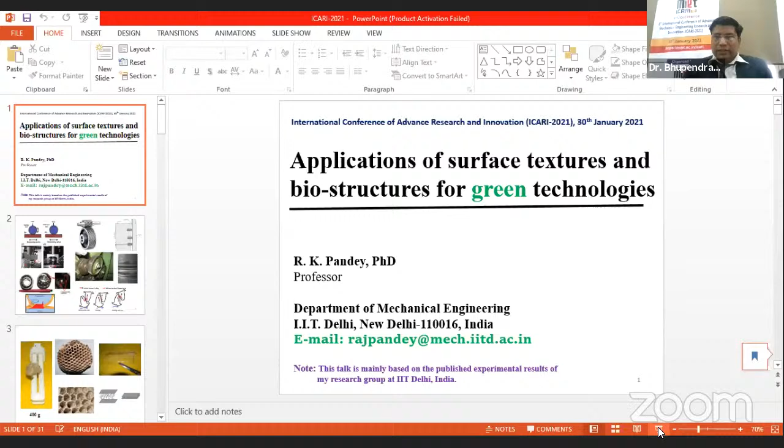Thank you so much. Am I audible? Yes, sir, you're audible. So I'll be talking through a presentation, I'm sharing my screen. Screen is visible? May I request to know? Hello? Yes, sir, you're audible. Yes, I'm audible and the screen is visible. Sir, your - not yet, sir. Not yet. Now? Now visible, sir. Visible now. Okay, so probably I have been given 10 to 15 minutes, so within that I would like to conclude it.

Whatever I am going to share, basically this is a gist of a small work we have done at IIT Delhi for developing the technology. So very clear cut, I'll be talking in terms of technology and how things have been achieved. Basically, we have used surface textures and biostructures.

Is it okay now? Can I speak? Hello, am I audible? Yes, sir. Okay, so if you see machines, we know very well that assembly of various components makes the machines. And if you see the assembly of components, basically contacts are being formed. These contacts may be concentrated contacts, meaning very small contact, or large contact area, which we call conformal contact, and small contact area non-conformal.

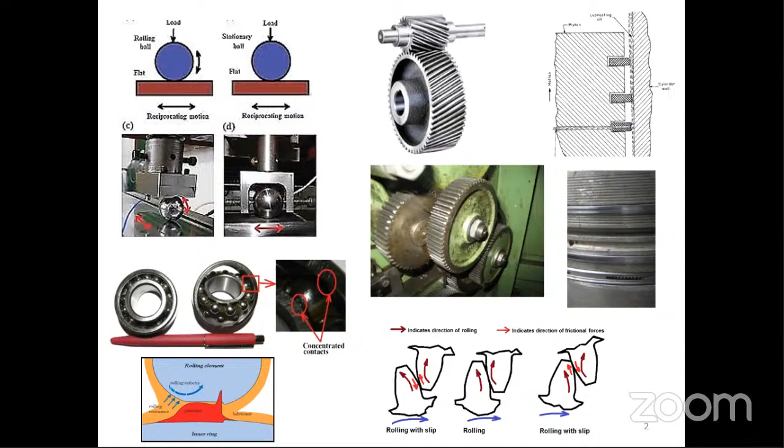So today things are failing at the surfaces, if you see. Those days are gone when things were failing in two parts, because technology is so mature, tools are available, so people can design that and that failure can be avoided. But when we come to surfaces, let's say bearing, ball and races, gears, teeth, wherever it is happening, friction is more.

So there, if you see at the interfaces, technology is not mature. If a particular operating condition, a contact is operating, this is perfectly fine, its behavior will be something else, friction will be something else, wear will be something else, noise vibration will be something else. Same contact, if we operate at different operating condition, then obviously things will change.

So the issue is that at the contact, things are not clear. And the way continuum mechanics based concepts have formulas available, theories, models, such things are not there at the interfaces, at the contacts. So issue is, people are still working to understand the temperament of the surfaces of the components and accordingly doing the manipulation for having a technical favor.

So if you see here, surface textures, it is emerging, and when we're talking about the technological issues, implying surface textures in 1-2 slides. So one point, if you are looking here in this slide, hope it is visible to you.

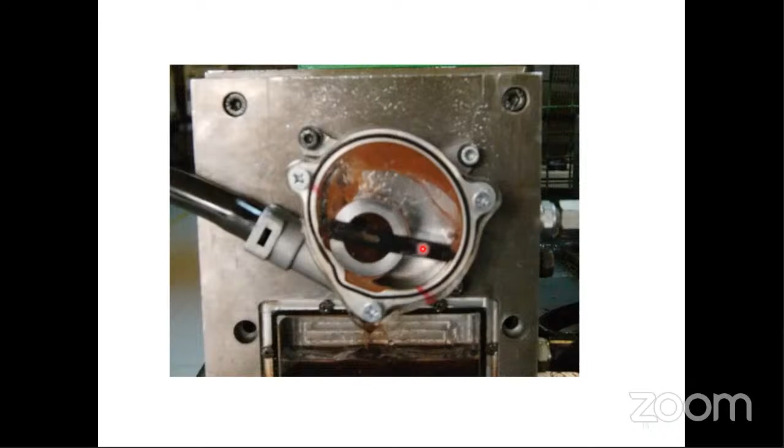And if you see very carefully, this slide vane is sliding. Let me go back and look here very quickly, just turning the slides. Here, if you see very carefully where it is, there is little bending here, so it is getting bent. Here if you see, this is a rotor and friction is present here between this and this surface, as well as here and here.

So the issue is that nowadays people are struggling to improve efficiency, and they are looking to kill the friction at some places at least. So when friction is here, it is not a good idea.

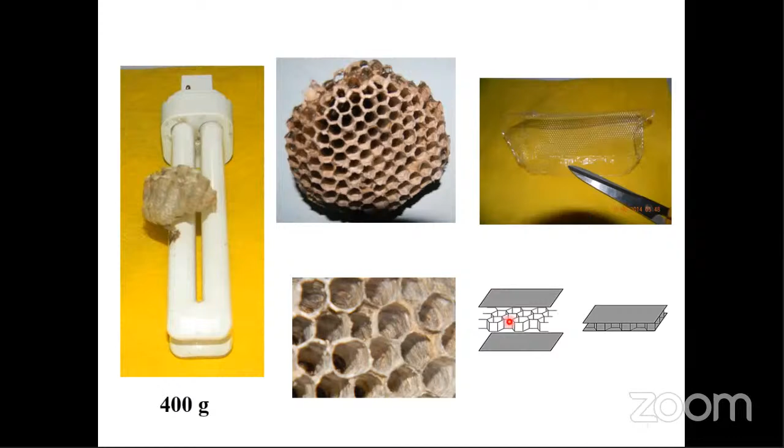So we brought the texture concept here. At the tip we kept it here, and here whatever bending you are looking at, it is there. So what we did, if you see here, this type of concept we used. A polymer layer is there, another layer is here. So using sheets only, we created this type of structure, whatever you are looking here. So now it was quite lightweight, and this type of bending was avoided. So lightweight, and tip friction we reduced using texture.

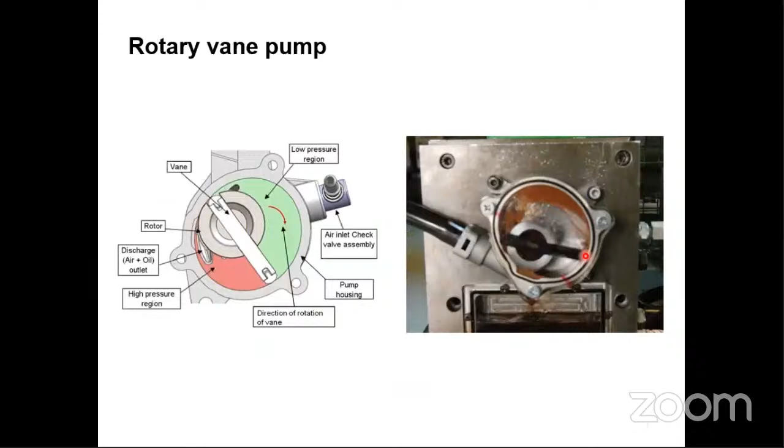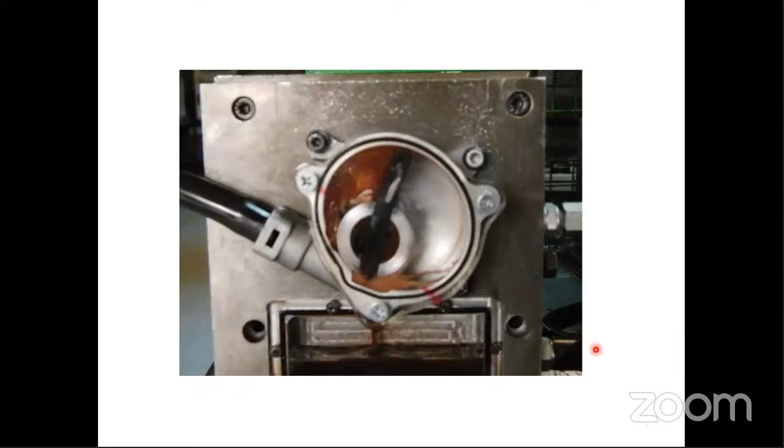I'll be talking about how texture plays a role in reducing friction. This is the technology we evolved basically. Now let us come to another point.

If you see concentrated contact, I mean when we are dealing with gears, ball bearing, cam follower etc., we know contact will be point contact theoretically, but practically when load is applied, elastic deformation will be there. So whatever line contact is there, that will be converted into maybe rectangular contact. Or if it is a ball on the surface, then point contact may become circular contact. We know very well that when we talk about concentrated contact, right now you are looking at the segment. This segment is basically one ball.

So how will stresses be varying? Stress won't be maximum at this point. The maximum shear stress will be maximum beneath the surface.

So the issue is, if we talk about this contact, if motion is happening at the contact, what will happen? Friction will be there in the tangential direction. If motion is here, then opposite to the motion, friction will be there on the surface. So when friction is more, wherever the dangerous point is, it will shift to the surface. You are looking here, right now it is here, it is coming to the surface. So it is not coming at this position, it is coming at this position. Earlier it was here, now it is shifting up.

So the issue is friction is very dangerous. Meaning, wherever a wound is there, suppose this is a very critical point. This critical point is coming to the surface and will be exposed, which is very dangerous. If any wound is there and that wound is open, then obviously it is going to be detrimental. So you are looking here, the same concept is being explained, and when friction is present, these are the isochromatics, basically maximum shear stress at the contact, how it will be distributed. We are looking, it is shifting to the surface. Now it is getting disturbed.

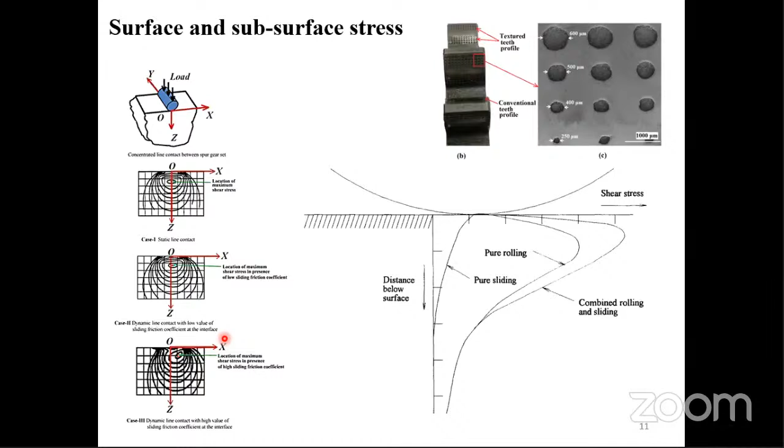So the issue is that when we reduce the friction, the tangential component will be less, and combined loading at the contact will mainly comprise compressive load, not tangential load. So the concern is, we know very well all these concepts.

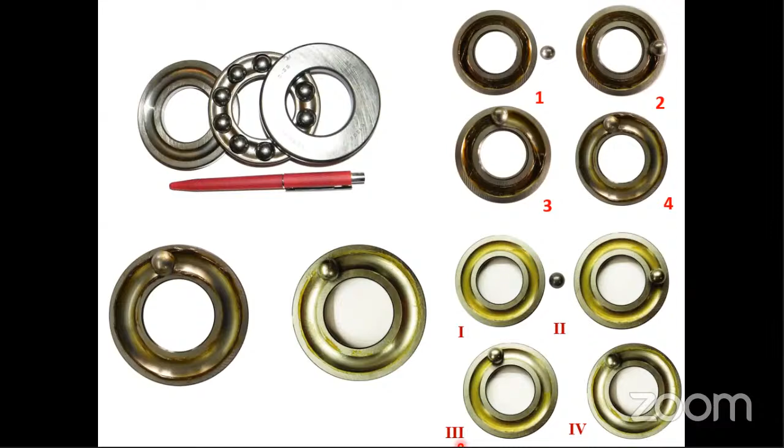So here, one technology we have developed shows how to retain the grease at the contact. You are looking at this surface texture - basically like a snake, if you see the underside of a snake, you might have seen this type of texture. So this type of texture we have created here. When this texture is created, retainability of grease will be there, and bleeding of oil will happen, and this oil will come to the contact.

So whatever groove is appearing right now, it is a very tiny groove - you can understand, 10 micrometers. To understand 10 micrometers in a physical sense, you can take your own hair - the diameter of that hair may be 40 to 50 micrometers. If it is thick hair, then it may be 80 micrometers. So you can understand what 10 micrometers means.

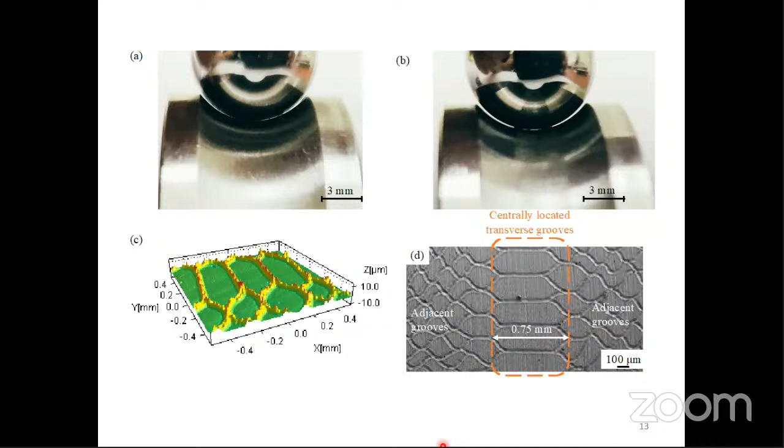So if you compare, by naked eye it is a little difficult to understand where scratches are present or not. Using this technology, we have drastically reduced fatigue life issues, vibration and noise of the bearing in comparison to conventional bearings. Similarly, we have used this in power transmission systems, gears, for longer life and higher reliability.

So here also we did texturing. Participants must be knowing, even in their machine design courses, it must have been taught that the surface should be mirror finished. The reason is fatigue life will be more - even textbooks at BTech, MTech level clearly state that with a mirror surface, fatigue life will be very high. The reason given is these scratches work as nucleation for cracks, and through passage of time, propagation of the crack happens. Then catastrophic failure occurs suddenly without any alarm. This is the mechanism reported in books, and what our teachers teach as the mechanism of fatigue failure.

So here, deliberately, when textures are created on the surface, then where is the fatigue? Why are things not failing? What happened is our understanding from 30-40 years back, what we developed, was incomplete understanding, because everywhere we said mirror finish surface should be there. But deliberately textures are being created, different types of textures, and better results are being achieved. So certainly something has been missed, and that, if time permits, I will discuss with you.

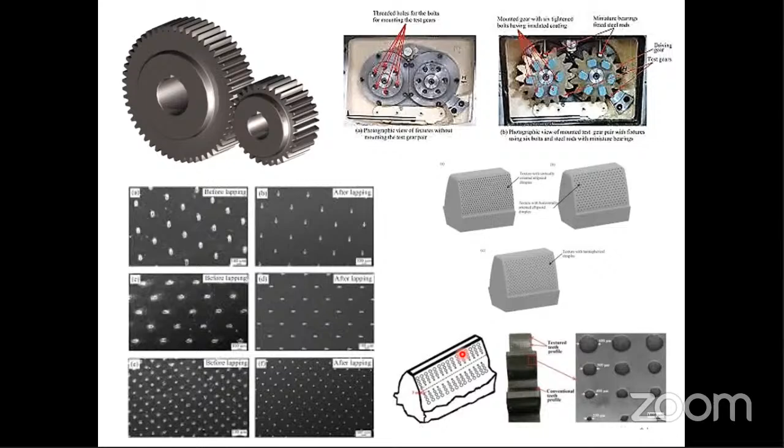So here we have also measured film thickness between the gear teeth, using the resistance concept. Both gears are revolving, and miniature bearings are being used at this end and this end. The issue is, when we used texture, fatigue life enhanced, friction reduced drastically, temperature rise reduced drastically, and overall reliability increased. And we know very well that gear lubrication is very tricky lubrication.

Effective lubrication won't be there at the concentrated contact. So what is the physics behind this, what is the mechanism? We should understand that when textures are created, these tiny, innumerable textures, maybe micron size or sub-micron size or nanoscale size, work as lubricant reservoirs. So the issue is that when there is a converging gap, quantity of lubricant at this section is more, but coming at this section quantity of lubricant will be lesser. This is not a pipe flow problem.

Basically one surface, if you are looking, this is a pad, you can say one plate. This plate is stationary, and this plate, the runner, is moving. So it's not a pipe flow problem where wherever pressure energy will be there, kinetic energy will be less, and vice versa. Here we understand the surface is moving, so it will carry the lubricant because lubricant will be adhering to this surface and dragged inside the contact. So quantity of lubricant at this section will be high, at this section will be lesser. Why? Because velocity is not changing, the surface is the same, so velocity everywhere will be u. And at the stationary surface, if slip is not there, velocity will be 0 - this is the lubricant fluid velocity.

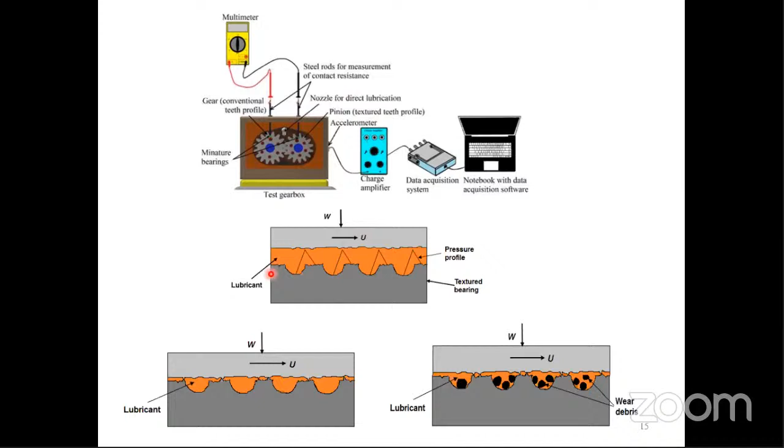Now one may say that when you are creating texture, micro pits etc., it may be detrimental. No, it is not detrimental. The reason is because fluid under pressure is there. If suppose we are cutting dimples etc., that dimple is filled with pressurized fluid, and the value of pressure is very high, gigapascal order, or we can say strength of the material order itself, whatever yield strength is there. Then obviously, crack won't be propagating. Even if pulsation nature is there, crack won't be propagating because dampening action is happening.

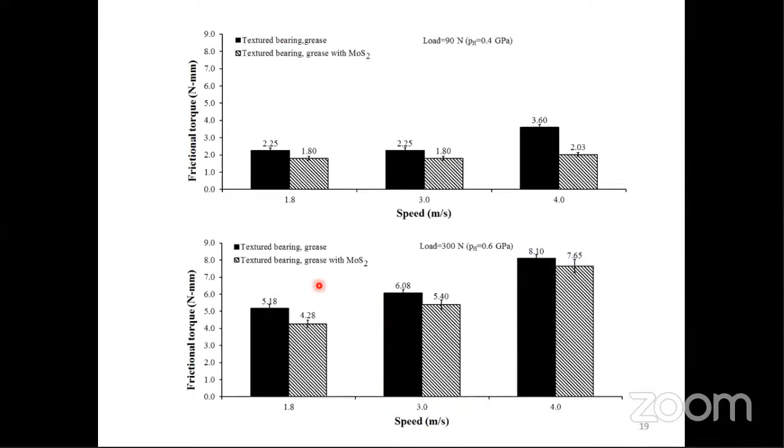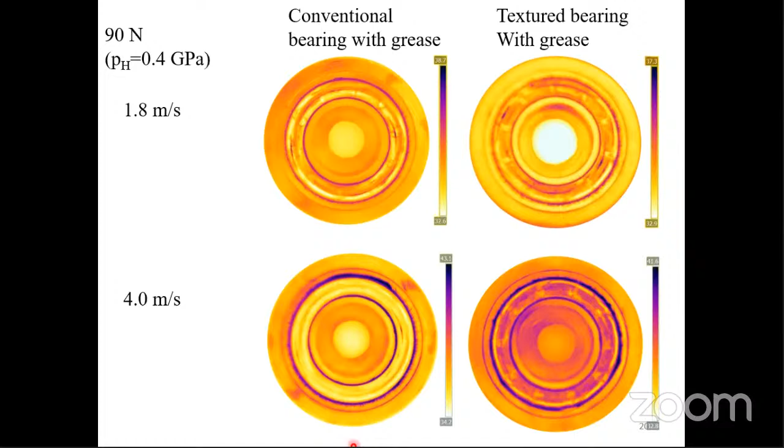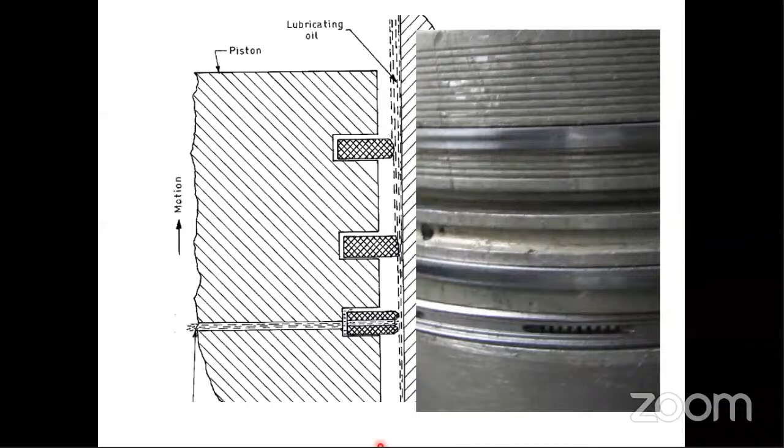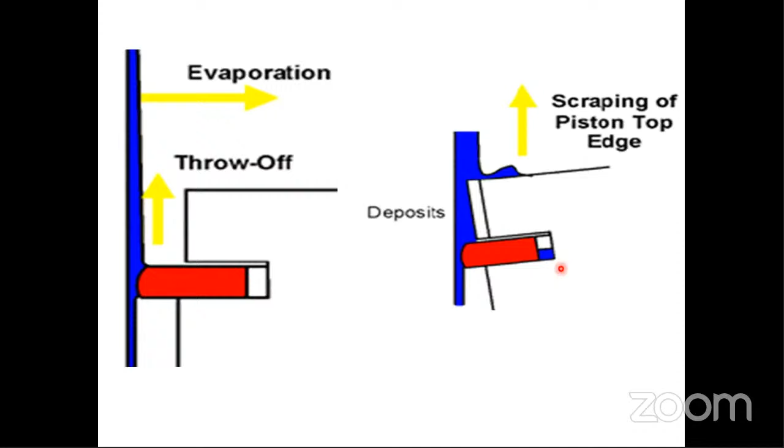Similarly, in engines, we developed technology. If you're looking here, this is a piston, and piston rings are there. We did certain surface texturing and design of the piston ring. Here also we have saved fuel, and emission has been reduced because per unit time a lesser quantity of lubricant is getting burned. This primary motion is consuming fuel, and this secondary motion is consuming lubricant, so there is a need to strike a balance.

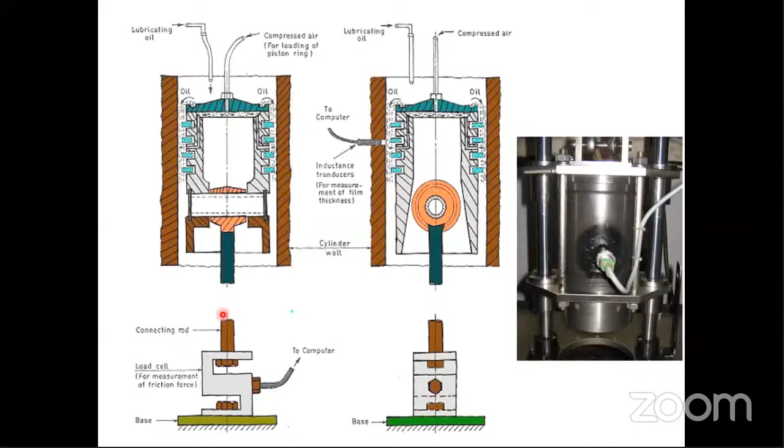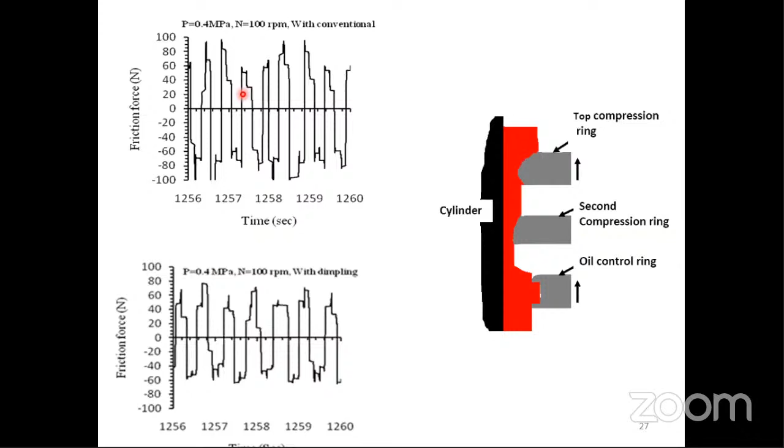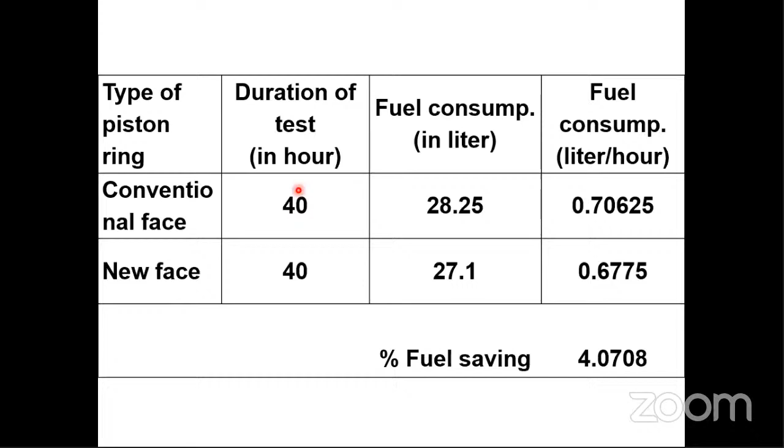Now I'll be very quickly finishing. So here we designed one rig, and we measured the film thickness and friction. The issue is when only one piston ring is textured, we see about 20% friction reduction happening. We used these textured piston rings inside an engine, conducted the experiment, and got about 4% fuel saving. Longer duration experiments were not conducted because resources were not there. So I would like to finish at this point, because of time limitation. In presence of microstructures, surface textures, we have drastically improved the dynamics, reduced noise and vibration, and achieved power saving. Particularly in lightly loaded conditions, surface texture is a boon.

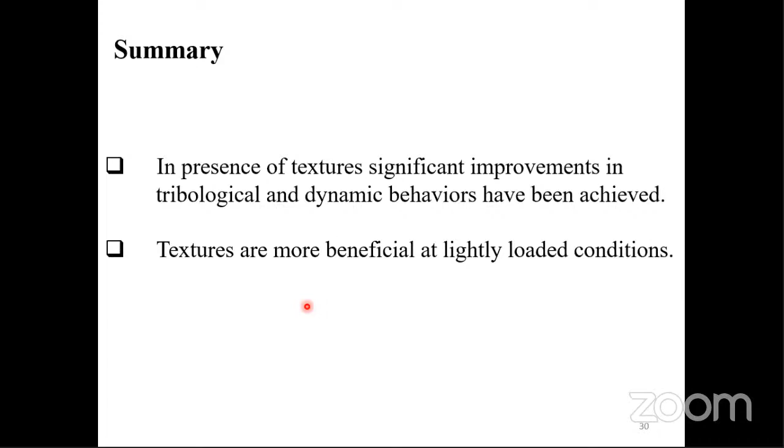So here I would like to conclude this talk. Certain biological structures we are exploring here to develop lightweight technology for space. I'm just giving ideas so that our young participant students might know where research is going on. Thank you very much for listening. Thanks a lot.

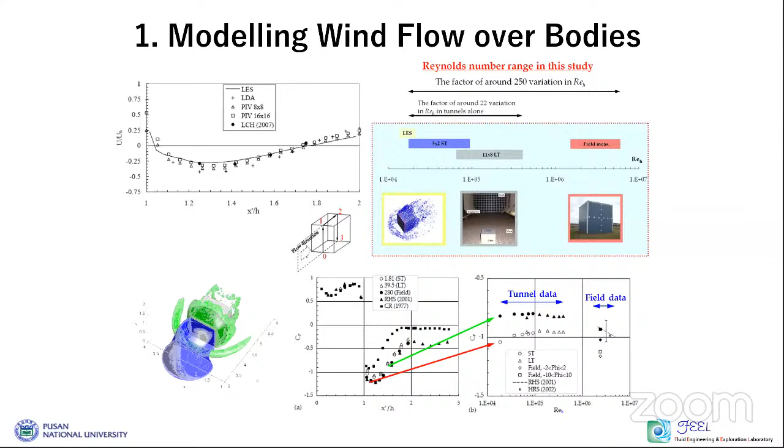In the figure on the left, you see the velocity on top of the bodies, and it was successfully well agreed together. The surface pressures along the center line of this body also agreed well between the numerical simulations and the measurement. That was a really interesting topic over the last 10 to 15 years.

As I mentioned earlier, the PIV measurement was one of my measurement tools and captured the two-dimensional velocity field by using an optical lens with a laser system. However, without proper software to predict the wind speed in the images, it would not be useful to use only hardware. So there has been development of PIV software in our laboratory.

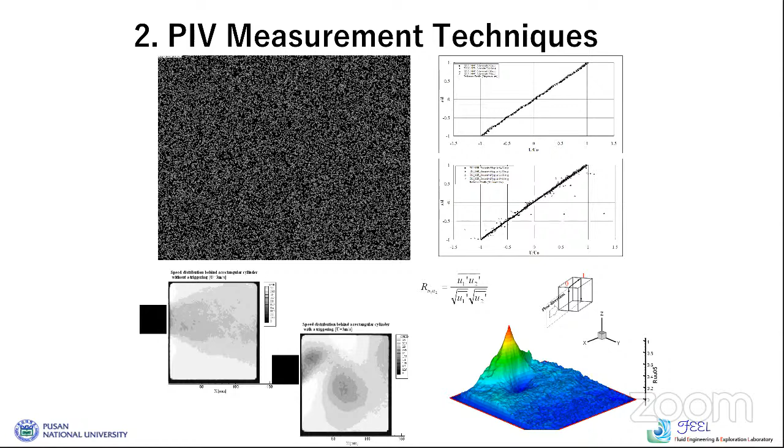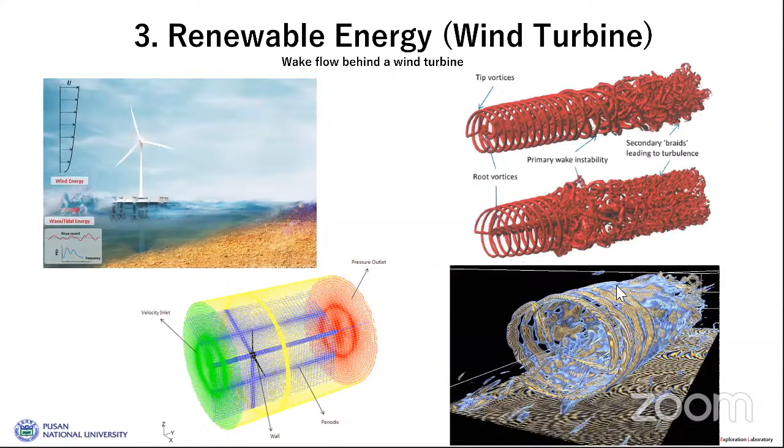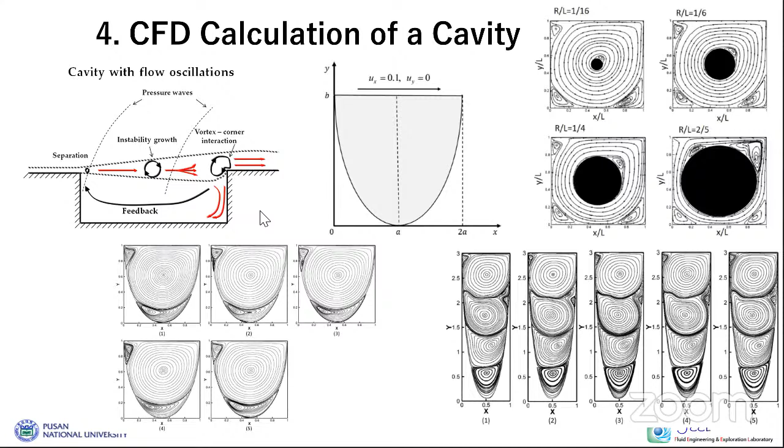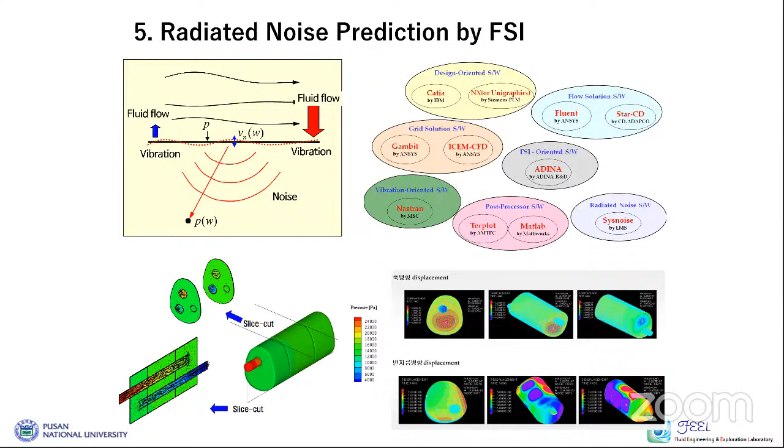The physics of micro and nanoscale flow would also be interesting to explore in this area.